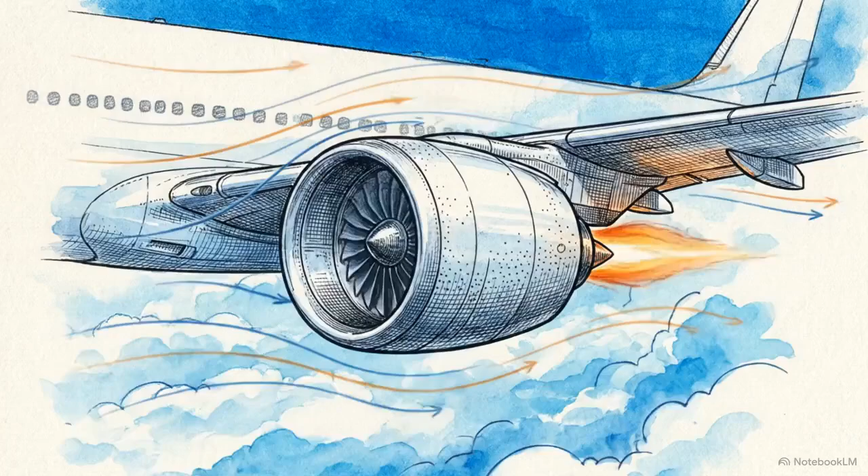Take a look at this massive jet engine cruising through the clouds. It weighs thousands of pounds, yet it easily pushes a heavy commercial airplane forward through thin, invisible air. How exactly does it do that?

We can view this engine as a straightforward, specialized factory. Most factories build cars or electronics, but this factory has only one product. It exists to grab air from the front and throw it out the back as hard as it can.

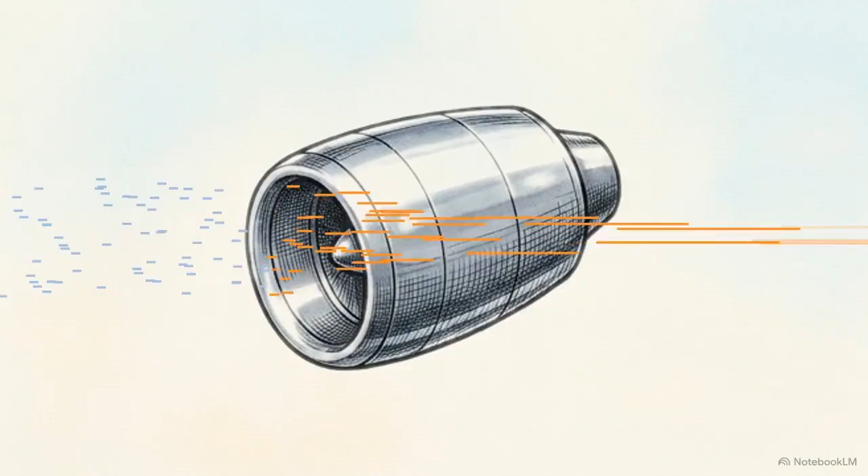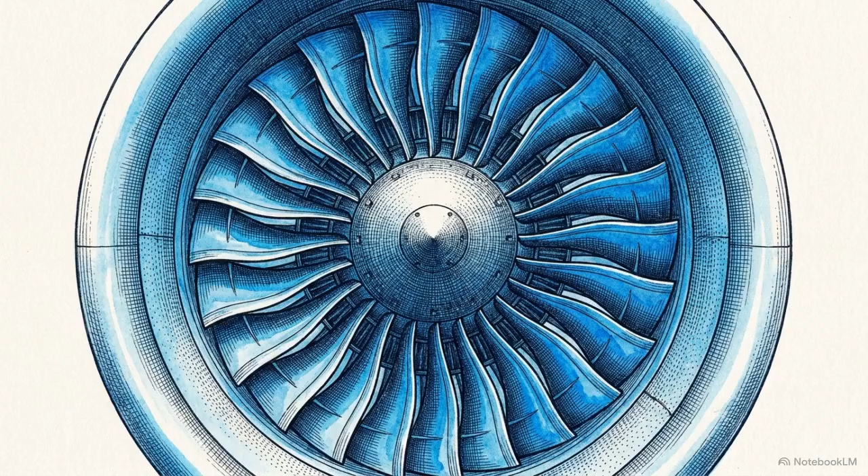To understand how an airplane flies, we have to step inside this thrust factory and see how it transforms invisible air into physical forward momentum.

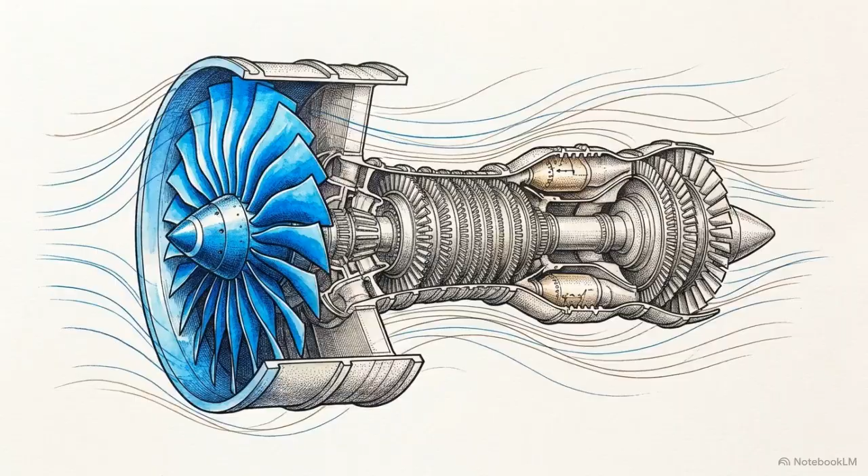As we begin our factory tour at the front of the engine, we have to ask, how does the engine actually prepare the incoming air to generate power? It starts with two main departments, one that lets the air in and another that squeezes it tight.

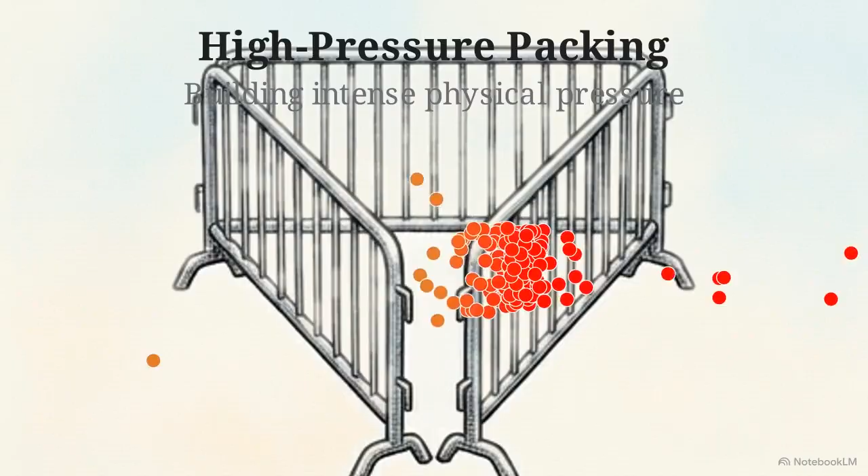As air enters a widening channel, it naturally slows down, causing particles to pack tightly together. Like a stadium crowd squeezing through a door, the air packs closer, building the intense physical pressure the engine needs. Without this squeezing process, the engine wouldn't have the concentrated air it needs for the explosive power stage that follows.

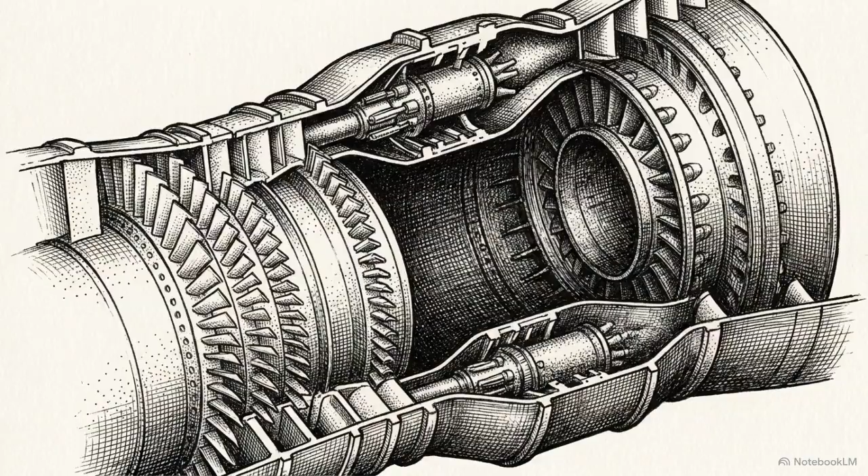Now that the air is tightly squeezed, where does the actual forward force come from? This is the expansion stage. Fuel is sprayed into that squeezed air and lit on fire. The air stays under the same pressure, but the heat causes it to grow drastically in volume, expanding outward with incredible force.

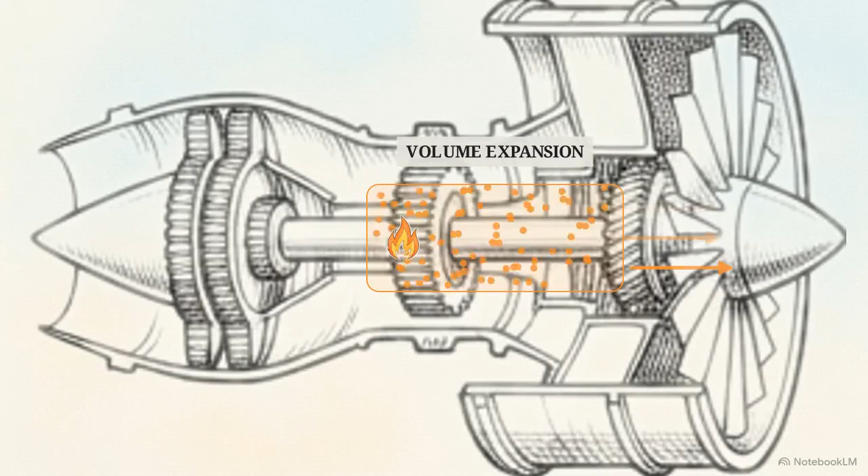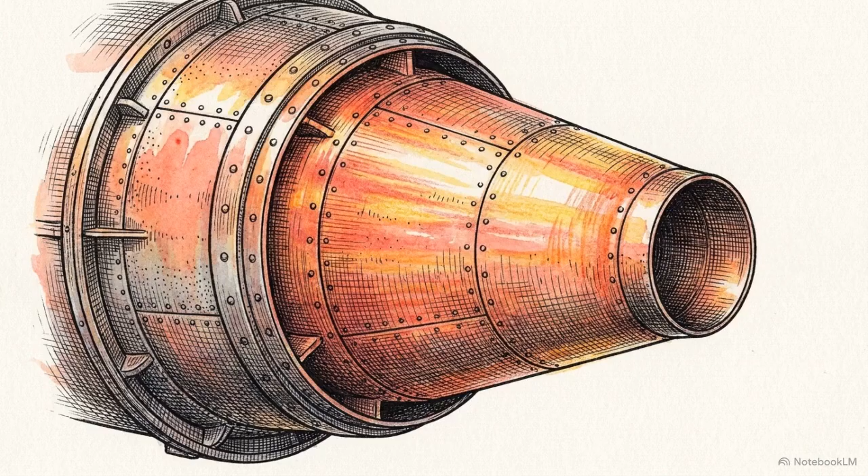How do we turn that explosive expansion of air into actual motion for the airplane? That happens in the final stage, where the hot air is forced out the back through a narrowing exit. By forcing the air through a tightening space, it moves much faster as it leaves.

It's like putting your thumb over a garden hose. Narrowing the exit makes the spray shoot out with much more force.

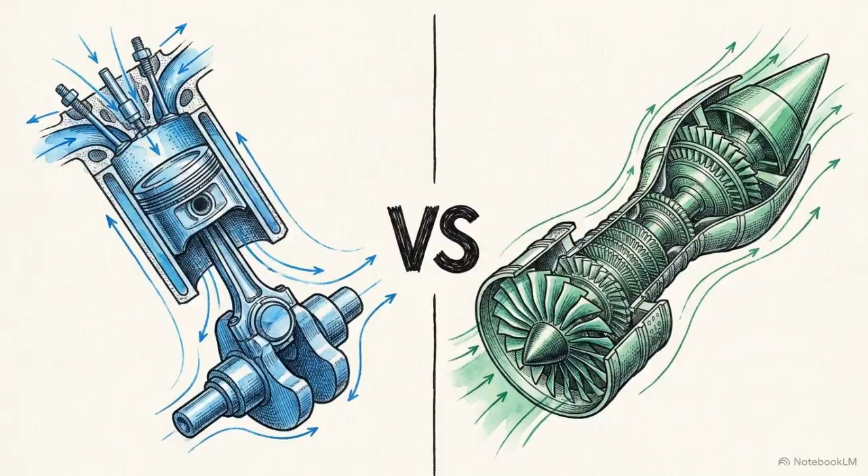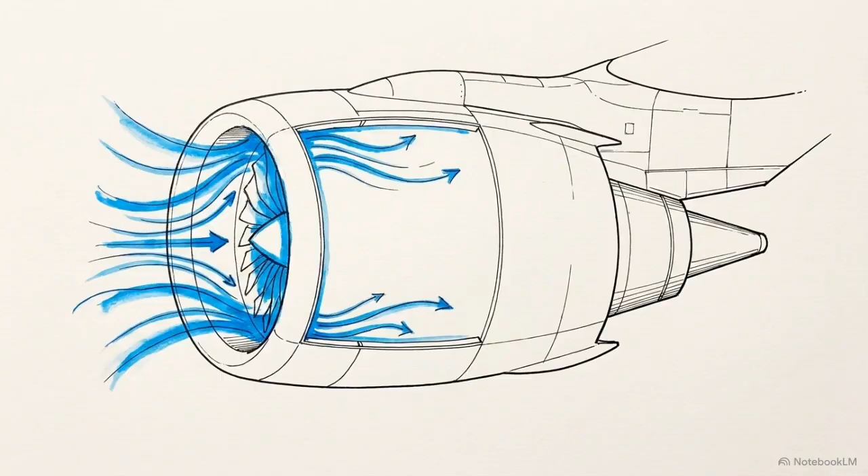Does this factory ever stop to reset? A car engine works in pulses, but a jet engine is different. Instead, it is an unbroken, steady loop of fire and air that never pauses as long as it is running. The engine is a continuous loop of breathing air in, squeezing it tight, burning the fuel, and blowing it out, constantly turning heat into a high-speed jet of exhaust.

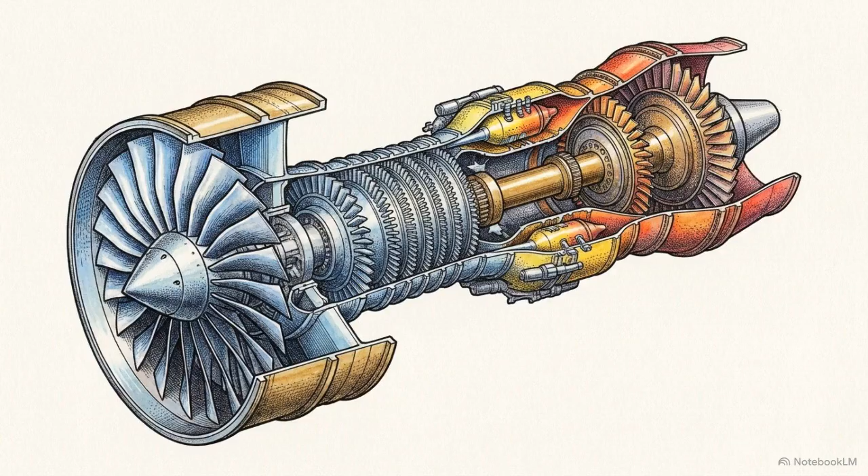Looking at the engine as a whole, we can finally answer the main question: how does a pilot make the plane go even faster? It comes down to a simple recipe. You have to either push more air through the engine or shoot it out the back at a higher speed.

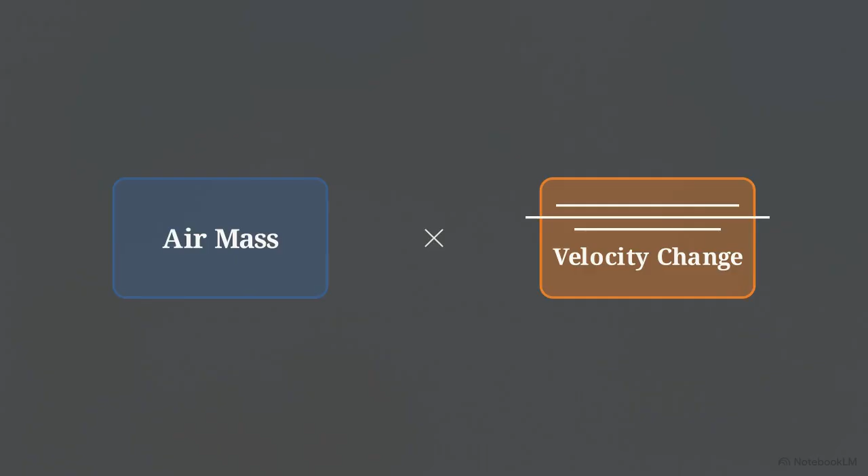This shows the math of flight. Total thrust equals the mass of the air multiplied by its speed increase from front to back. Blasting this air backward creates an equal opposite force, pushing the aircraft forward.

The next time you look out an airplane window at the engine on the wing, picture this continuous four-step factory working away inside. Keep asking questions and exploring how these machines actually conquer the sky.

Aircraft thrust is a mastery of moving air backward in order to move the world forward.